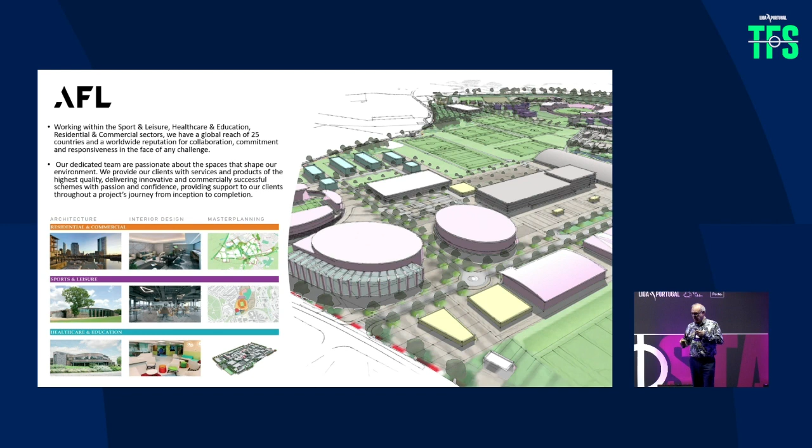All of these come together to form a master plan, and it's important that the master plan is quite clear and clearly defined at the very beginning.

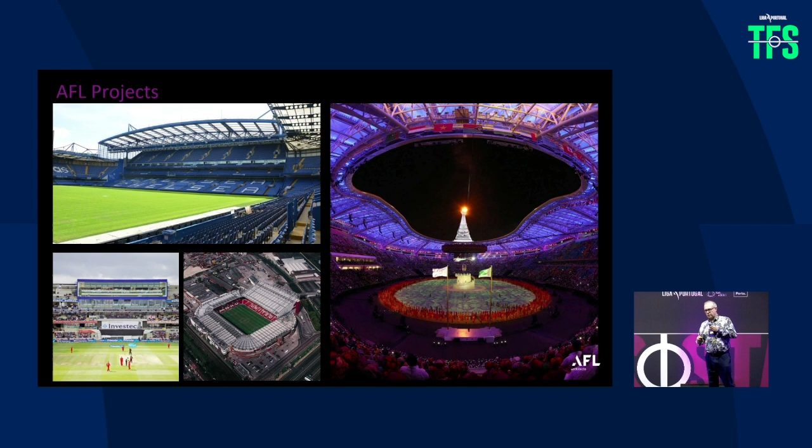It's not just about the football clubs, the cricket clubs. It's also about events, because events are a catalyst to regeneration of a city, whether or not that is in the leisure department or arenas.

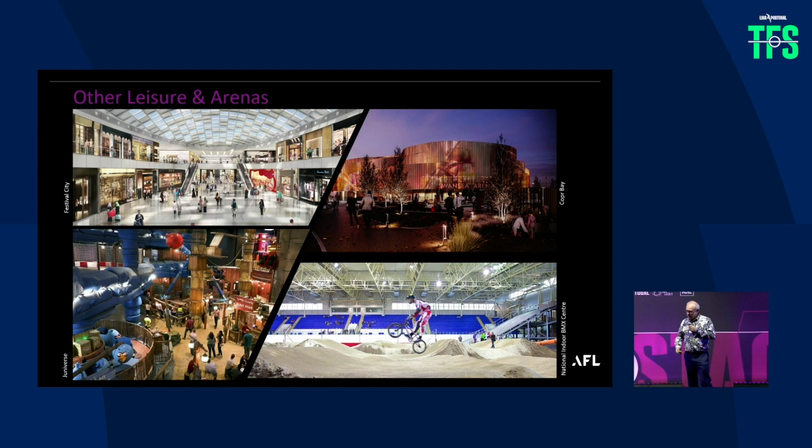I'm Welsh, by the way. I'm going to Qatar. Yes! I've waited many years to say that.

So the brief we normally get is, I want a FIFA-compliant stadium, we need 60,000 seats - but they're only getting 10,000 spectators coming along to a game. So often we go, well, actually, do you?

Because we can build big projects, spend a lot of money, and in essence, we don't need to.

So there's three types of projects and three examples that I'm going to be talking about. One is Lusail, where it was specifically built only and just for the World Cup, but the legacy is not about football. We also have Atatürk Stadium, which was built to be a venue for the Olympics - they were unsuccessful, and it's now going to be used for football.

And we have Brentford, a community stadium, 17,000, totally different capacity, but it was designed with a brief as a Premier League venue. When they started, they were only in League Two, 20 years ago, and they had a vision for a stadium. Their brief changed over 20 years, but they are where they are.

So I've built grey elephants. They should be white elephants, but I call it a grey elephant because it's in the middle of South Africa.

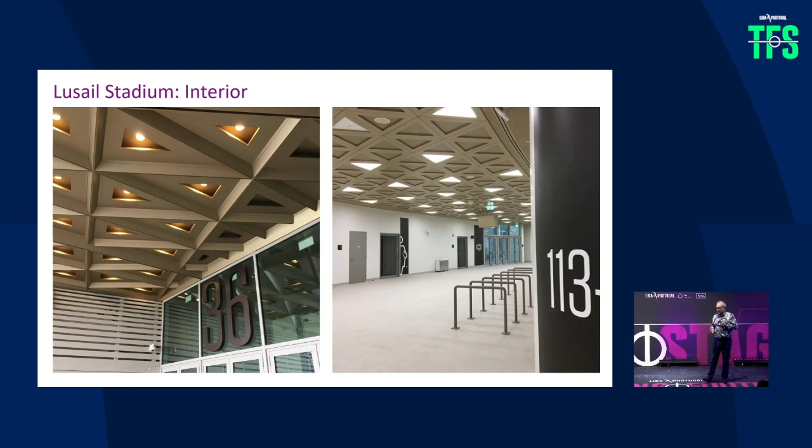Hopefully, whoops. There should be a video playing. It's a bit like a roller coaster, I'll tell you. I watched it on my... No, it's okay, they want to have their lunch.

If you go on YouTube, you can find it. It's a fantastic fly-through of Lusail Stadium. It shows the qualities and the facilities in there. But be warned: sit down, don't stand up, because they've used one of these drones and they fly around the place.

So the second project came out after we were lucky enough to win the rights to write the bid for Turkey as a candidate for 2024. I was very lucky, I visited every one of these venues. It's an amazing country, it really is. I think they're also bidding for 2028 and 32, I think it is.

The legacy here was quite different. So for Atatürk Stadium, within the overall bid, we developed a scheme where they could convert the existing site, because the site was already designed to host 80,000, 90,000 people. So why find another site for a 60,000, 80,000 seat stadium when the infrastructure and the facilities are already in place?

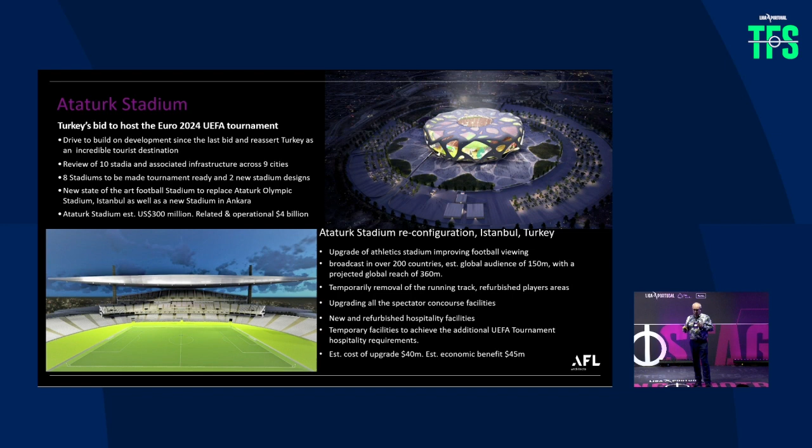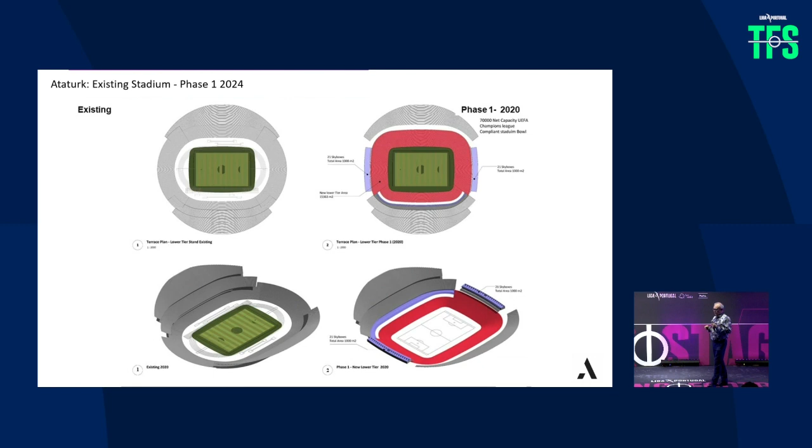So we started by looking at the overall timescales. What could we achieve in the various timeframes? So the first phase was going to be the insertion of a new lower tier, keeping all of the existing facilities, but linking and providing a better atmosphere for watching football.

We were going to convert all of the facilities on the ground floor, and we have actually done most of these works already, to convert it from being an athletics venue into a football venue. Luckily, because athletics have numerous warm-up spaces, call-up rooms, a myriad of changing rooms, we were able to convert and combine all of these to form a UEFA-compliant facility.

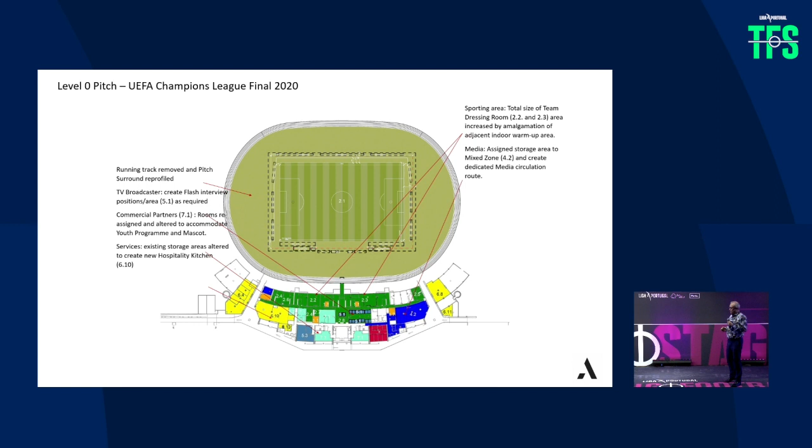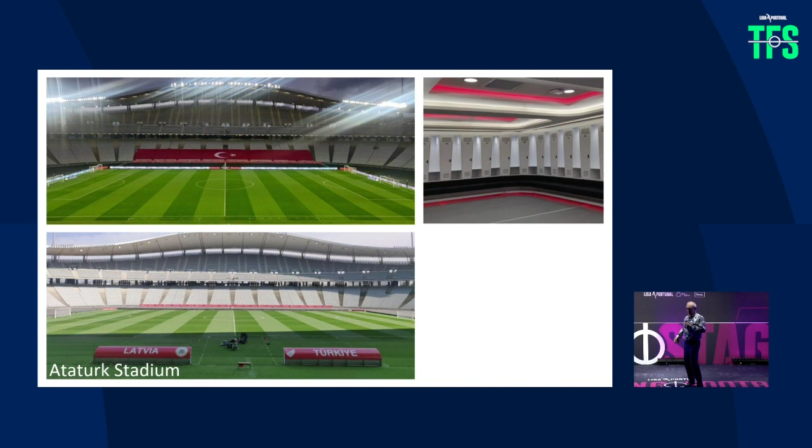And yes, it will host some great football here. Hopefully Liverpool will win it again, having been successful there in 2005. And actually Wales are playing Turkey in June. So again, hopefully another symbol why I'm going to be going to Turkey.

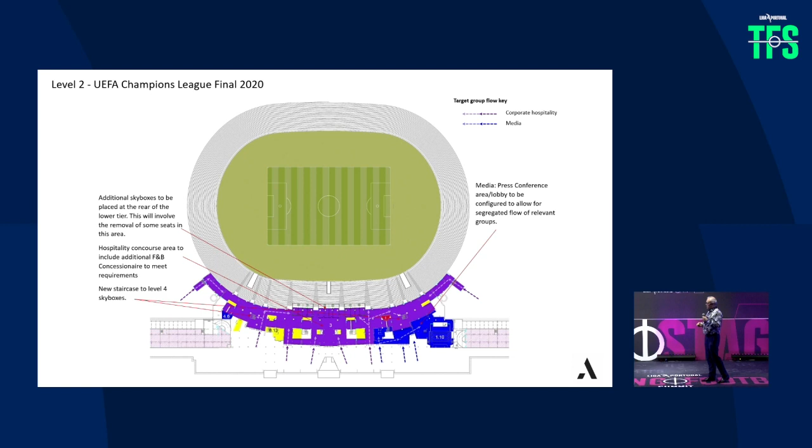This wasn't just about improving the general facilities in there. This was also about providing better accommodation for those with disabilities, providing improved accessibility into a stadium. Because don't forget, this venue was designed back in the 1990s, when nobody thought about wheelchair access for ambulant disabled, etc. So we were providing better accessibility and inclusivity in here.

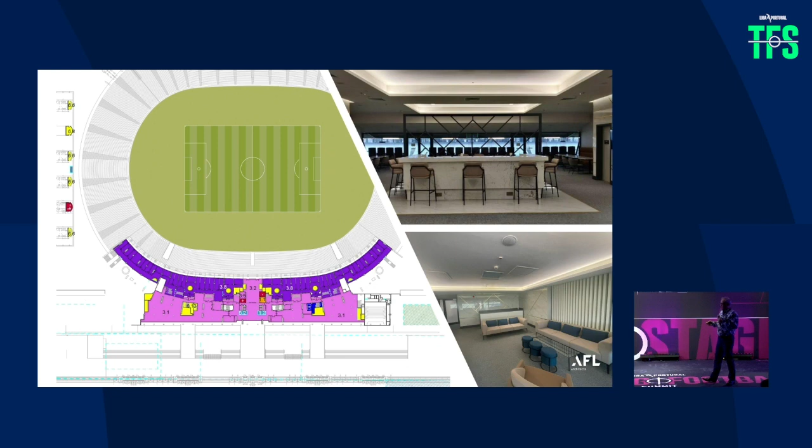The requirements for corporate facilities has changed as well. So again, we reviewed, replanned, reworked all of the interior spaces from the players' facilities all the way up to the hospitality, and including the concourse facilities.

And then phase 2, should they have won the rights to host 2024, was after the Champions League final, was to build effectively a new upper tier, converting this into what they called a machine for making money, because the problem the TFF had was that this venue was not going to make any money because there was no corporate facilities, there was no real support facilities, there was no non-match day activities in there. And at the end of the day, when you've got a venue this size, you need those facilities.

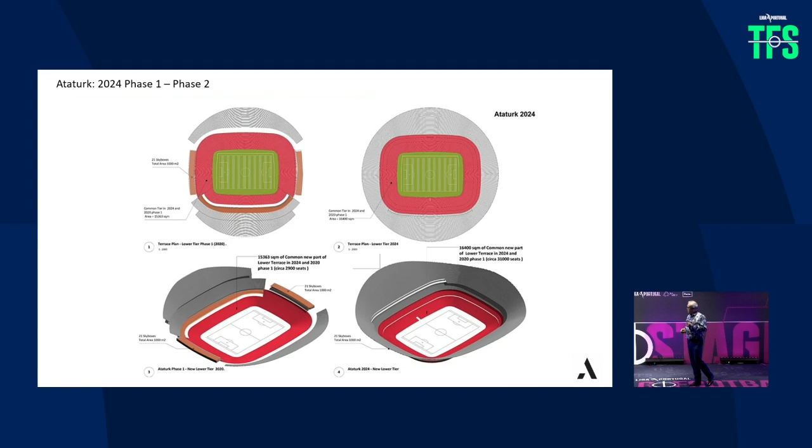Their benchmark was Wembley, where Wembley was producing income for the FA. They wanted to be doing the same. So again, we looked at reworking and retaining as much of the existing facilities as we could, so that what was built in 2020 was ready and capable of being reformatted to provide a stadium ready for the 2030s.

Quite a different scale. Brentford basically got this stadium, and in essence it's paid for by these residential tower blocks - 1,000 apartments in the centre of London next to the Thames with a view of Kew.

They started working on this, as I said, 20 odd years ago when they were in League Two. And what they've ended up with is a Premier League compliant stadium.

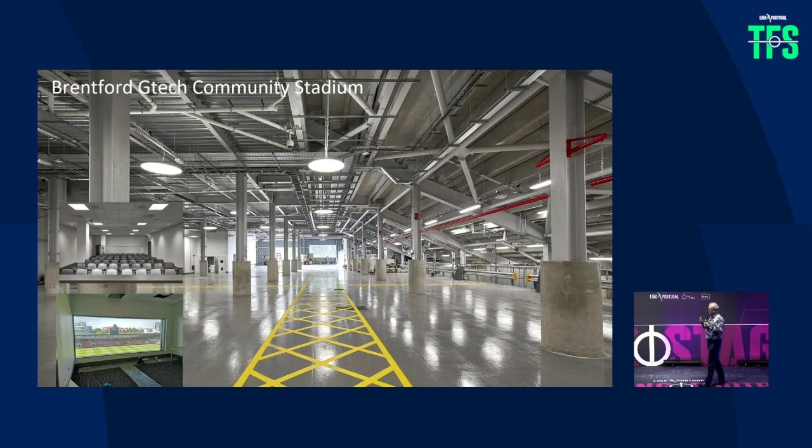The key point here was that we had to think about, it's a tight site. How do we cope with modern Premier League broadcast requirements? So we built a big garage underneath the stand, and linked that to the TV studios, the press rooms, etc. Sky, who are based down the road, now use this as a base because it was designed for broadcast quality facilities. But it's also capable of hosting other events in there, like e-games, because you've got the clear height. So this is about building flexibility into the venue to cater for things the club didn't know at the time they could host here.

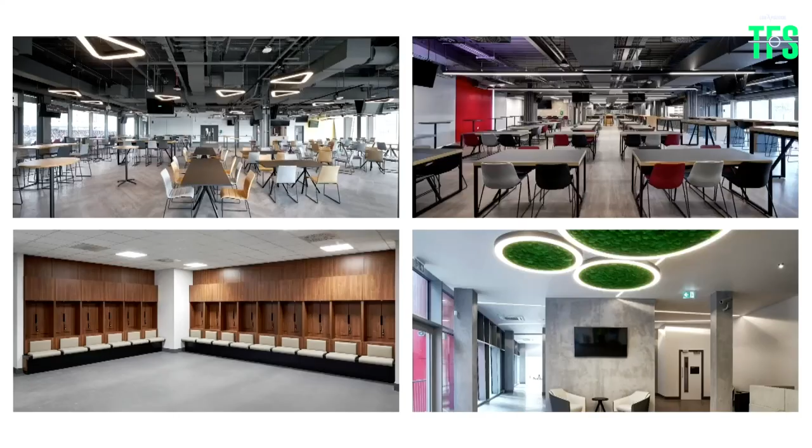And again, hospitality is king. They have 2,500 hospitality, 7.5% of the capacity at different levels of provision of food and drink. But again, it's not just about football. It's a community stadium, about bringing other facilities in here. It's also capable of hosting rugby, and one of their tenants is London Irish, a Premiership rugby club. They also share this facility.

The one thing this place did was open during the pandemic. The fans didn't get the joy of leaving the old stadium and moving into the new. I was watching the football being played here during COVID, and thankfully we put those dotted seats in because it looked full, it looked great on TV. If there's something I've learned, it's do more of that, because it does help fill and make the stadium look full.

So the conclusion I've come to is that you need to define the legacy, but also test the legacy. Get somebody in to write the business plan, make sure that it works. There's plenty of people out there capable of doing that work for you, because otherwise you're spending millions and billions of dollars, pounds, euros, whatever. It's also about agreeing what those design parameters are. Designing a FIFA stadium is not appropriate for a small venue of 20,000. Luckily, FIFA have now just published a new document which deals with stadiums that are not about major events.